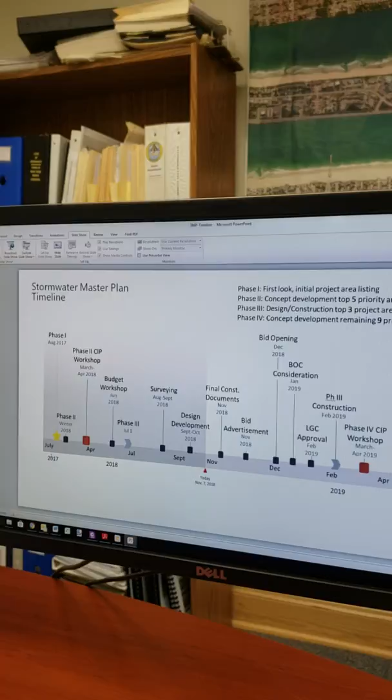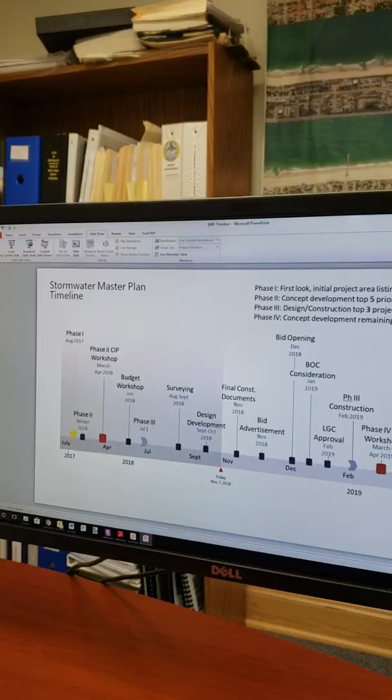The stormwater master plan, which began in July of 2017, consisted of a multi-year approach towards stormwater management here within the town of Nags Head. It was broken into parts due to the fact that the town wanted to continue to commence with construction work as well as proceed with planning efforts at the same time.

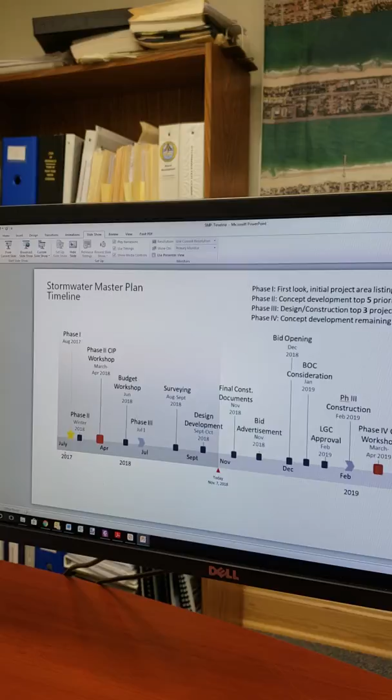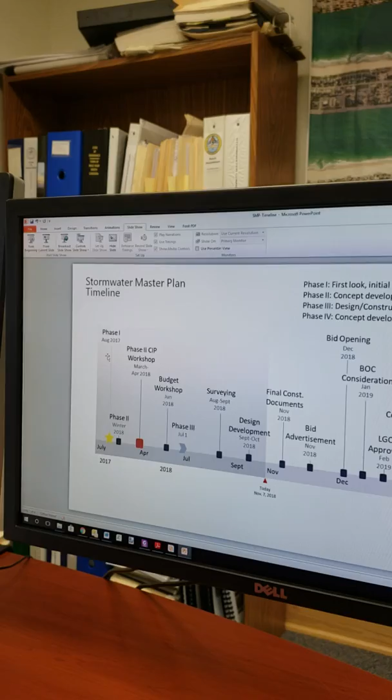So the first part consisted of the initial look and assessment at the problem areas throughout town with the development of a project area listing, which was prioritized based upon a predetermined set of criteria. This then proceeded to breaking that out into further segments to try to carry forward as soon as possible to get these projects under construction.

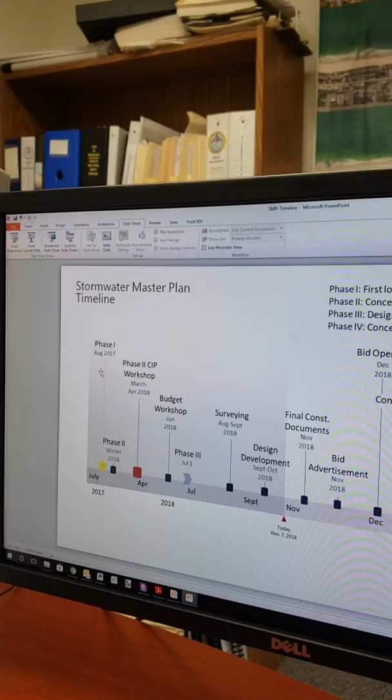The segments were broken out into the top 5 project areas, and then in later years consideration of the remaining 9 projects. So in March of 2018 at the town's CIP, or Capital Improvement Workshop, our board considered the top 5 projects with 2 different alternatives, which was prepared by the town's engineering consultant, Withers Ravenel.

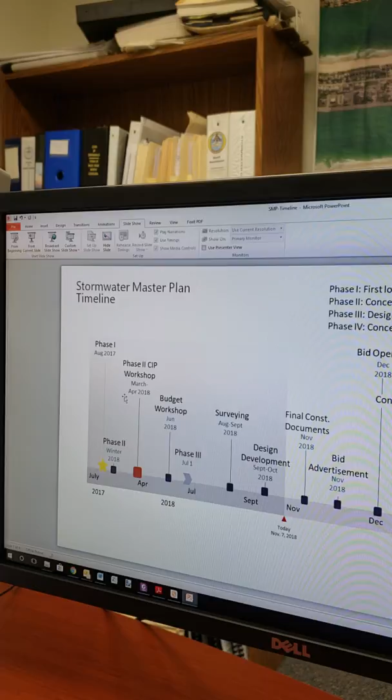Each one of those areas was reviewed, assessed for potential benefits in these problem areas, and it was determined at the town's budget workshop in June that we would proceed with the top 3, with a second look at project areas number 4 and 5.

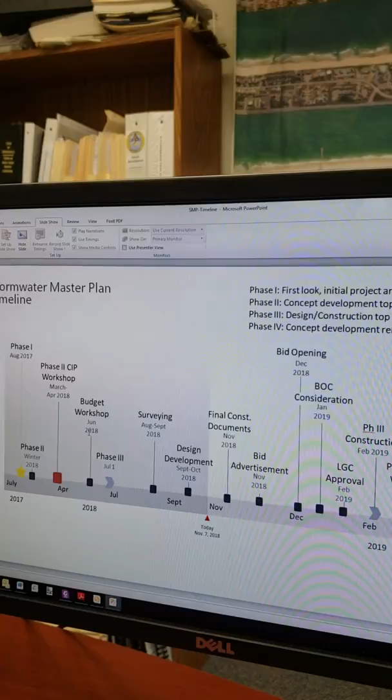And all of this was done in order to proceed to construction as soon as possible, which those funds became available on July 1, 2018.

From there, we commenced to surveying as far as trying to get the existing conditions within the project areas, utility locates, and interagency coordination with regards to meeting with the regulatory agencies and getting the necessary permits to go to construction.

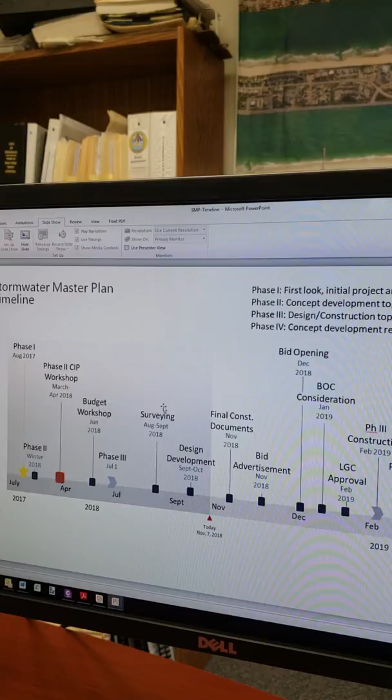The town has been working with our engineering consultant with the design development over the past several months in working towards final construction documents, which are now in the process of being finalized.

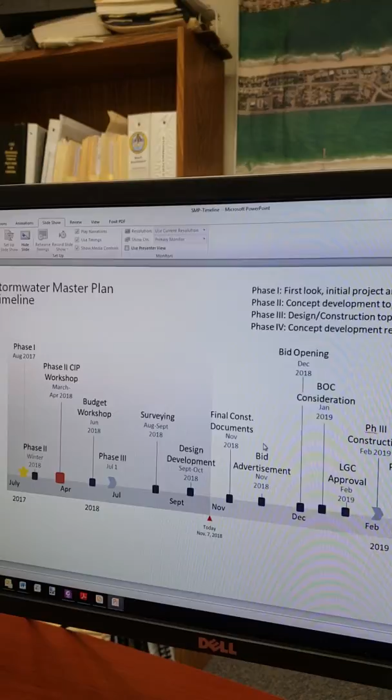The next step in the process is to go out to bid. We will be following the formal bidding guidelines based upon the value of the project. We anticipate that will happen at the end of November, and then we will have a bid opening right before Christmas.

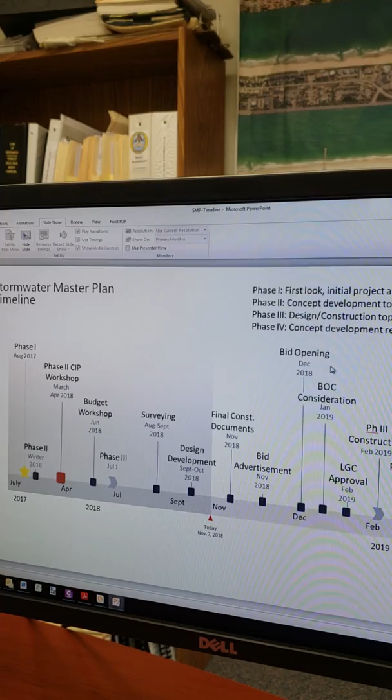And the next part of the process will be for board consideration of the construction contract, and then the financing portion of that, which will be performed by the local government commission and the review of the financing.

Once this is complete, we hope to be under construction for the 3 project areas in late February of 2019. And we anticipate that depending on the project, we're looking at a potential 3 to 4 month construction window for each.

On a parallel path, our engineering consultant has been working on the remaining 8 projects, or in this part it's 9 project areas, with one of these projects being incorporated into the town's multi-use path planning efforts.

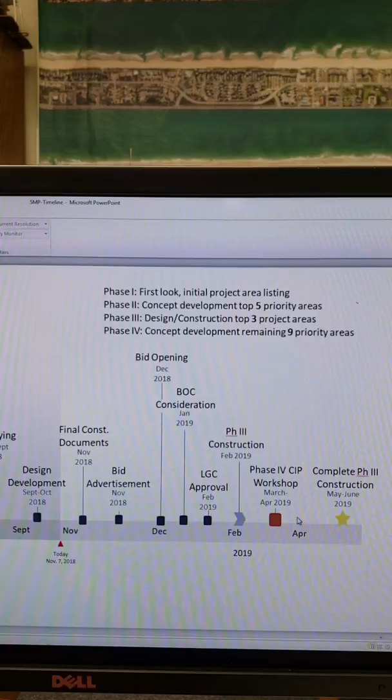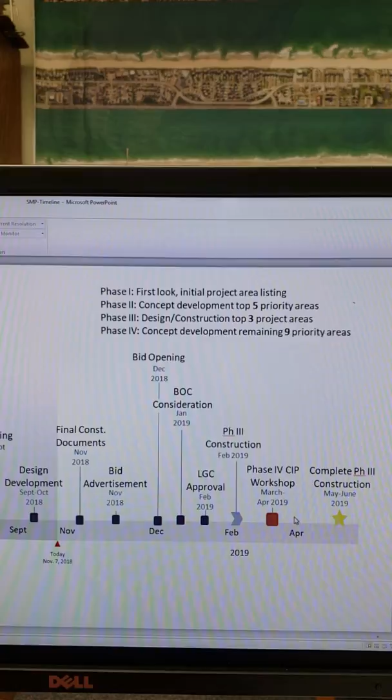So this information will be carried forward at the board's CIP workshop in the March-April timeframe of this coming year, and again following the same approach that we had previously, with several different alternatives being provided and assessments as to the benefit of each one of these project areas for our board to consider and carry forward for future construction efforts.